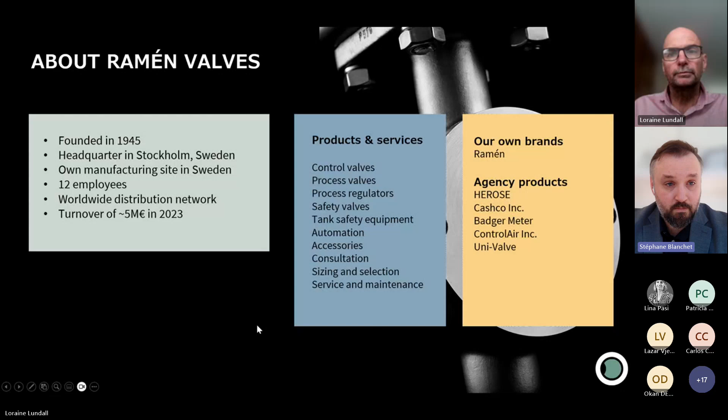Yes, Loraine, you can move on. Okay. Yeah, right, so that's on you now. You can continue. Right. My name is Loraine. Good afternoon, everybody.

I will first and foremost just go to the website. So at ramenvalves.com, you will find a lot of information about valves and valve solutions. And now we're running information on hydrogen. You're welcome to go and read up on that. If you want to go to the product platform, you can select any of the products, and it will take you immediately to the product platform.

Okay. Sorry, on top. And then on the product platform, you can choose valves, process valves, regulators, safety valves, tank safety equipment, and spare parts. I just quickly want to show you how it works. So we go to control valves, and you can then select whatever control valve you want. In this case, just quickly select a Ramén KSC valve, and it will take us to a configuration.

So in the configuration tab, we can select a modulating valve, size DN50, soft seated design, single acting, 4-20 milliamp, and immediately it will give us all the technical specifications here. You can get some more information there, and then at the bottom you will find data sheets, instruction manuals, certificates, brochures, 3D STEP files. You can also compare this to another valve if you want to.

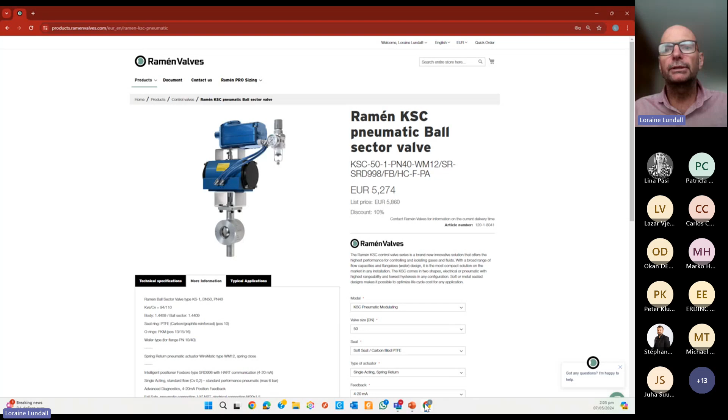Okay, let's go to the sizing. So from here, you can go to the control valve sizing. I've already opened it, so I'm just going to jump in and go to the sizing tool. So the sizing tool is a highly specialized sizing tool from Conval. It is a very professional sizing tool, and we suggest that you make use of it as much as possible.

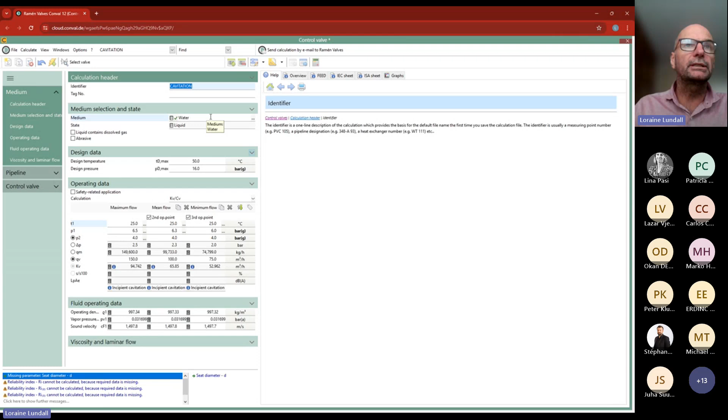First of all, you would like to change your units. You can select imperial or USA units, or you can select metric units. In this case, we selected metric units. For cavitation, we're going to make it easy, and we're going to do just plain water. We select water. You can just type in water by name, or you can go and search for it in the 3 dots on the side, and then you can search for the fluid that you want to size for.

Design data we're going to use as 50 degrees Celsius, and maximum design pressure 16 bar. So let's quickly go through the process data. We're going to have 3 points, a maximum, mean flow and a minimum flow. And we have 25 degrees on the inlet. We have 6.5 bar for the maximum flow, 6.3 for mean flow, and 6 for minimum flow. We have bar gauge. This is pressure control, so we will have all on 4 bar for the outlet pressure.

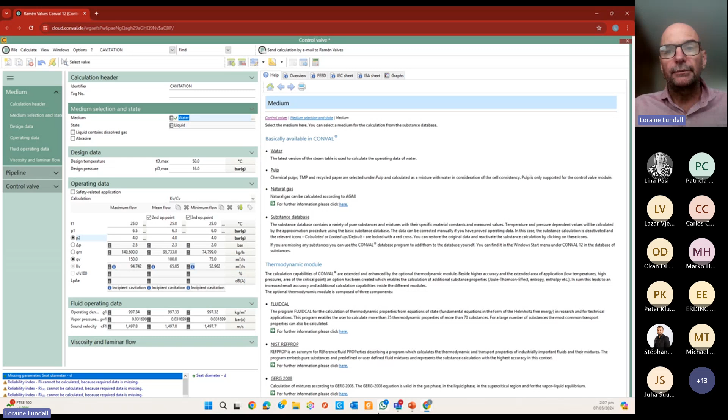Our flow rate is volumetric flow rate, and it's 150 at maximum flow, 100 meter cubes at mean flow, and 75 meter cubes at minimum flow. So I'm not going to go into and select the product right away, but at this stage, as you will see, we have information that says we have incipient cavitation. So let's go to the details, and we go to the next slide, and we will discuss from here.

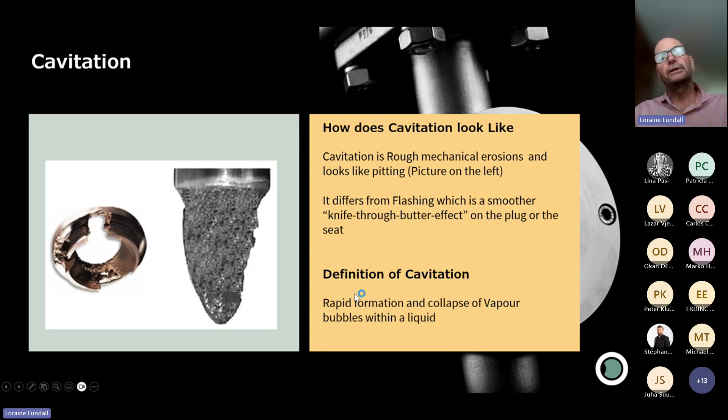So let's first ask ourselves a question: what does cavitation look like? Cavitation is a rough mechanical erosion, and it looks like pitting, as per the picture on the left. Where it differs from flashing is a smoother knife-through-butter effect on the plug and the seat. Many of you have probably seen this and wondered what happened to your valve. Now, the definition of cavitation is the rapid formation and collapse of vapor bubbles within the liquid.

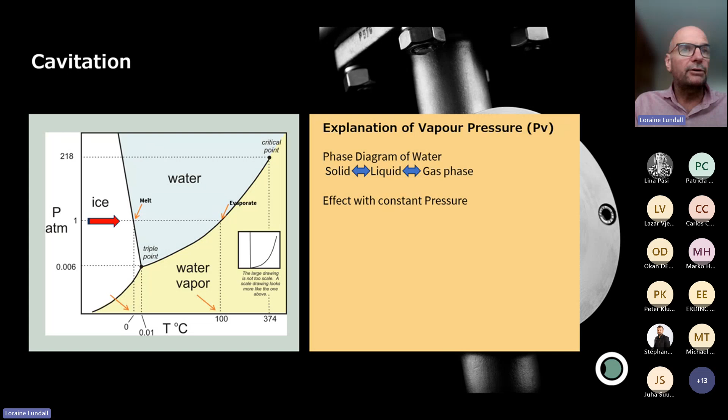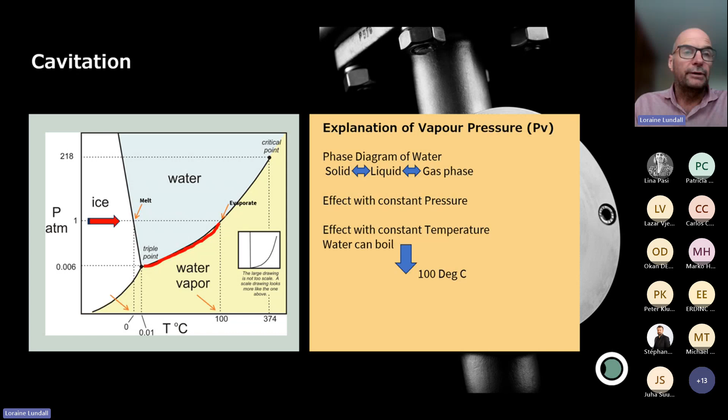So the effect of constant pressure is at 1 bar, water will melt at 0 degrees Celsius and will evaporate at 100 degrees Celsius. The effect of constant temperature, where the pressure changes, water can boil below 100 degrees Celsius, and water turns to a vapor form. So how does cavitation occur?

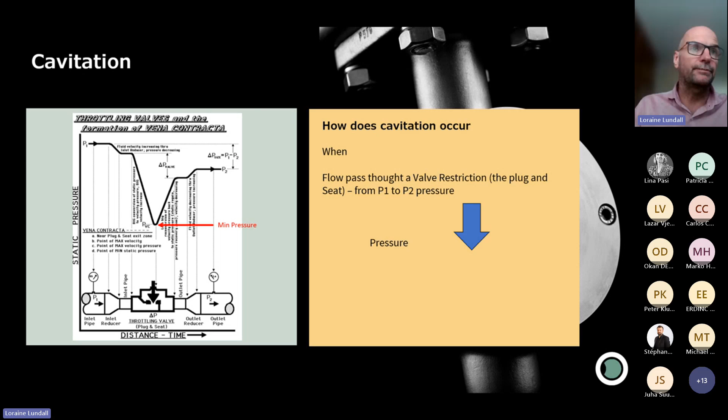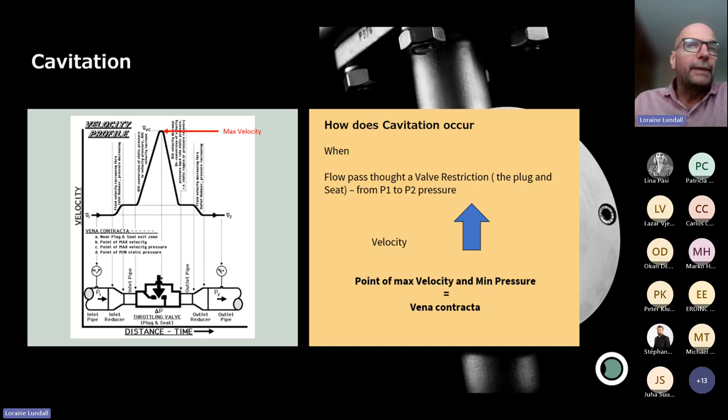When flow passes through the valve restriction, the plug and the seat, from high pressure, P1, to a lower pressure, P2, the pressure decreases to a point of minimum pressure. As the pressure decreases going from P1 to P2, the velocity increases. The point at maximum velocity and minimum pressure is your vena contracta. You also notice that your vena contracta is downstream of your orifice, not exactly at the orifice.

So when the pressure drops below the vapor pressure, we have 3 graphs on the side. Here our inlet pressure goes down to the vena contracta, and to the lower P2 pressure. It does not cross the vapor pressure. In the second graph, our vapor pressure and vena contracta are the same point. So that is almost where the cavitation will start.

The third graph, you will see that Pvc crosses the vapor pressure, a bubble forms, and it recovers downstream, and the bubble implodes at P2. And that is when cavitation starts. So the first step of cavitation is the formation of the bubbles. When the P2 pressure recovers above the vapor pressure, the bubble implodes or collapses. I can quickly show you a quick video of how this looks.

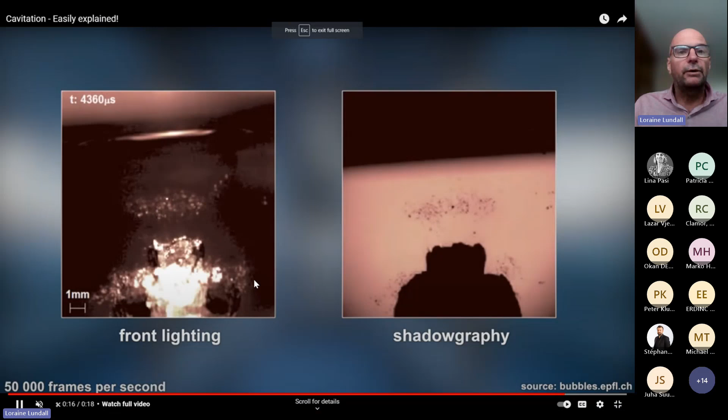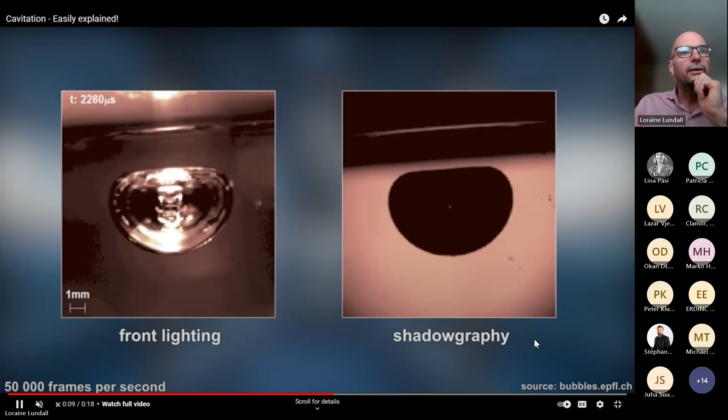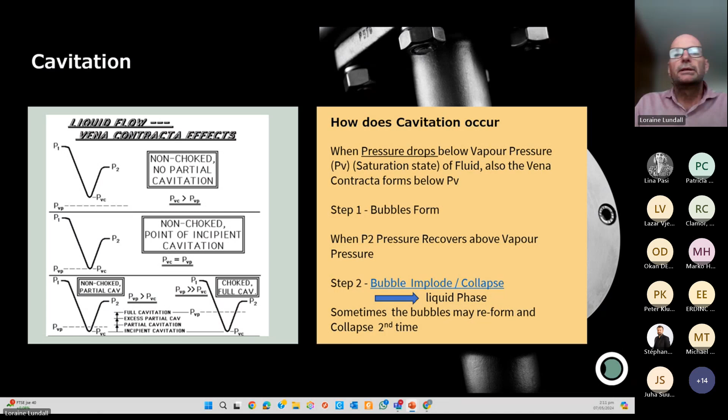And you will see there the bubble gets some pressure from the top, indented, a jet forms, and it pushes the bubble and it implodes. So going back to the slide. What we see is the implosion of the vapor bubble. Liquid microjets form. The liquid microjet from the recovering pressure creates an indentation in the bubble.

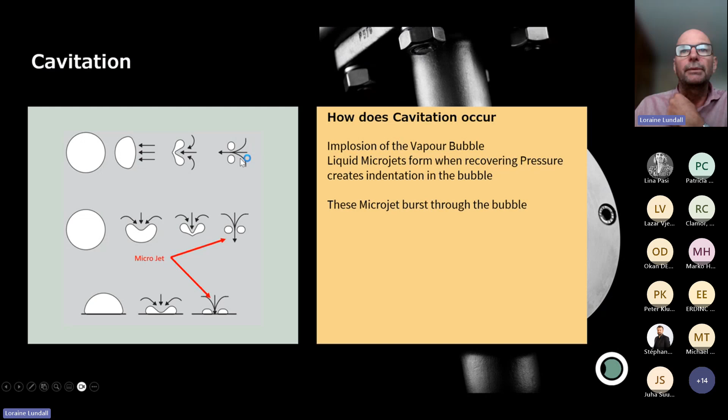These microjets burst through the bubble, and the implosion and the collapse also cause pressure waves up to 100,000 psi. The combination of the microjets and the pressure waves cause mechanical damage to the plug and the seat, as well as the valve body. It also causes noise and vibration, loss of efficiency, and loss of process control.

So in this picture, you can see where it implodes. In this bottom picture, you can see where it implodes against the wall of the valve. And this is where it will physically damage your valve at high speeds.

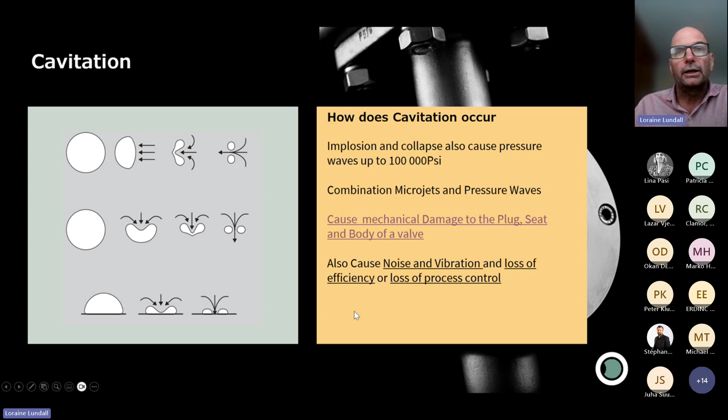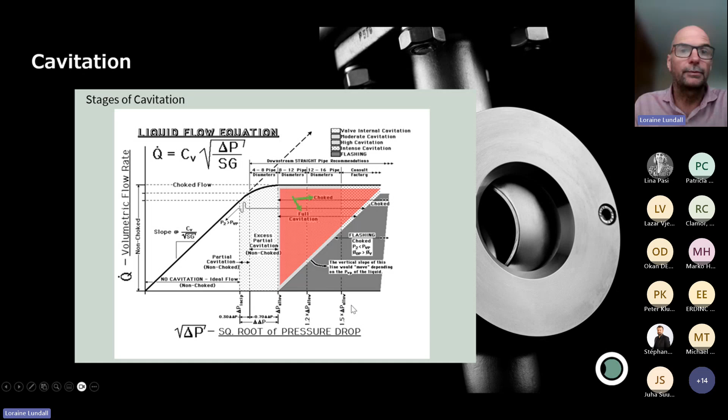Cavitation does not always cause damage. Damage will occur when, as I just said, the intensity of the cavitation is high, when the delta P is high. When materials used in the area of cavitation are not hardened; hardened materials reduce the damage. Continuous exposure to cavitation: if the valve is continuously exposed to cavitation, then the long-term effect of that would be horrendous for the valve.

The valve size: larger valves sometimes make it worse because the valve will control to a position closer to the seat, and wear will just cause the trim to be damaged more. The wrong design of the valve and trim, and leakage occurring between the plug and seat. When leakage occurs between the plug and seat, you obviously have a high pressure going down to a low pressure. This will cause cavitation, and that will damage your valve. So preferably you will need to look at leakage.

Cavitation is caused by fluid pressure, not by flow. This is very important to note. On the picture on the left, you will see that with the valve at 25% open, the cavitation occurs close to the seat area. As the valve opens more, the cavitation actually moves downstream into the pipe. And it is interesting to see that the flow just changes the location and not the effect of the cavitation.

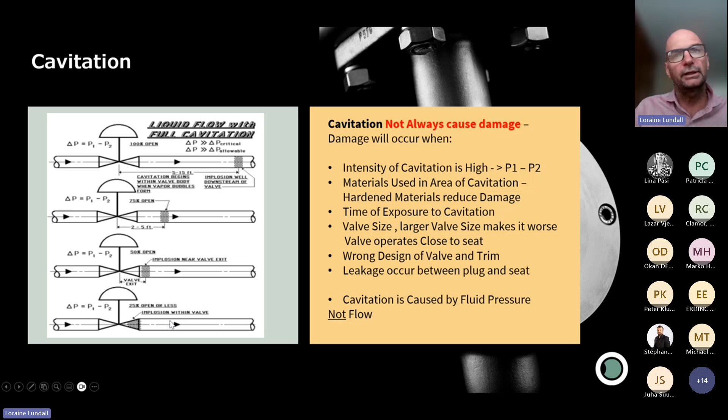Good. So I'm going to go to Stéphane now. How Ramen overcomes cavitation; he's going to address the first point for us. Yeah, so as you say, there are several stages of cavitation. First you have incipient cavitation, and then you have severe cavitation or choked cavitation, as we say. We will see in our sizing program that it will state which stage it is.

Most often, when you have incipient cavitation, we can handle it by using our model KS1B, which is our metal seat design. It's a full stellite seat with a hardened ball sector. The ball sector is treated with Expanite treatment, which increases the hardness, typically by 5 times the standard hardness of stainless steel. So for incipient cavitation, we can use our model KS1B, and that will definitely solve the problem, meaning that the cavitation itself will not have any effect on the valve. You won't have any damage on the ball sector or the seat because the parts are hard enough.

The 1C is a little bit more complex or more robust because we have some other parts in the valve which are treated, such as our seat holding ring, which is basically the cover on the body, which is also in contact with the media, and we treat it also with Expanite treatment to increase the hardness. So that's a very robust design that can definitely overcome incipient cavitation. All right, Ryan. Yep. Good.

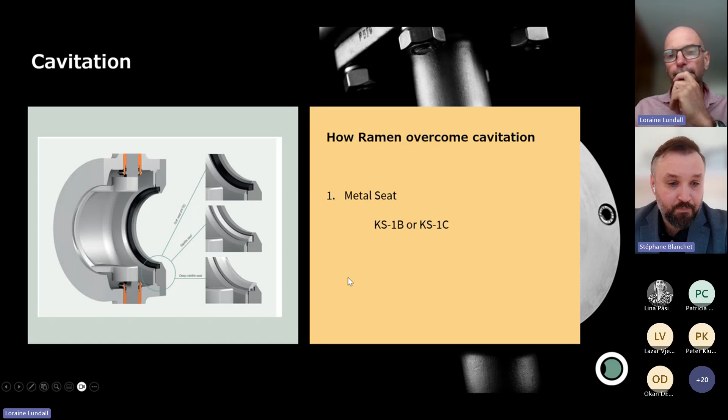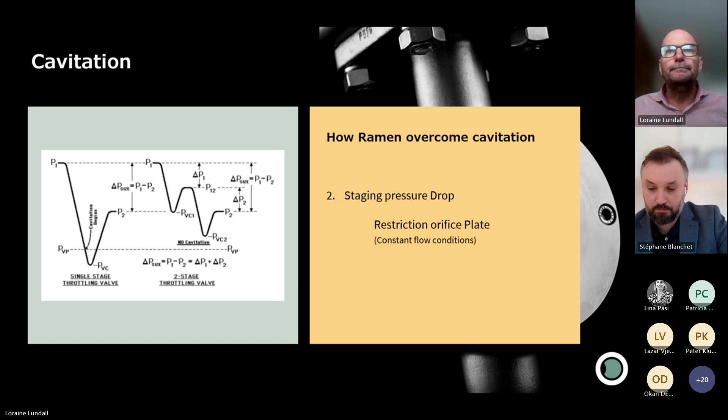So the second way to do it is to stage the pressure drop. By staging the pressure drop, you actually prevent the vena contracta going through the vapor pressure. So going from P1 to P12, the pressure doesn't drop that severely, and it doesn't go down to the vapor pressure. Then on the second stage, you go from P12 to P2, and your overall pressure drop is then without cavitation. So a restriction orifice is a good solution in this application, especially where there are constant flow conditions, not highly varying flow conditions. So yeah, a good solution to solve the problem. Stéphane, will you take this one for us?

Yeah, so that's typically when you have severe cavitation, when you cannot stage the pressure drop. You may have, for example, particles in the media and so on, so you may not be able to use an orifice. And then what we can provide in that case is our model KS1E. So it's actually also a stellited seat ball sector valve, which is always fitted in reverse flow. So that's basically the picture on the bottom left.

You see on the top left what it should be, normal direction. So the flow enters on the right and exits the left, and you have possibly the vena contracta inside the valve. But if you put it in reverse flow, the bottom picture, then you have the vena contracta outside the valve, which means that the cavitation will happen outside the valve. And as a result, of course, the body, the ball sector and so on will remain intact because no cavitation will actually happen inside the valve.

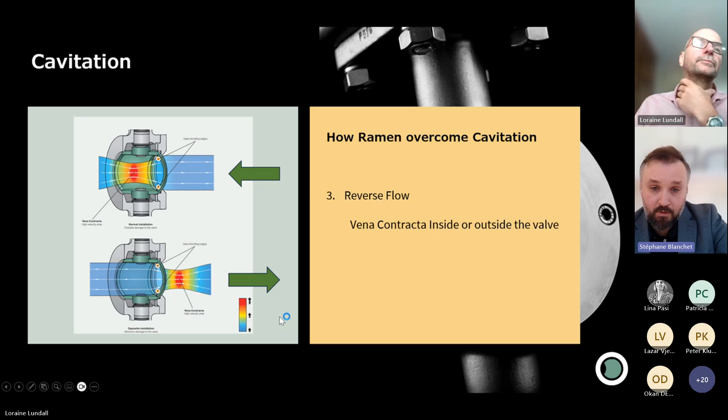So that's something that we sometimes provide whenever we have customers looking for a solution with similar products having damage on the body or the bore or the plug, whatever. Then we provide our most robust solution, which is our model KS1E. We put it in reverse flow at the bottom left, and cavitation will happen outside the valve, definitely protecting the body, and you will not have any damage inside the body. So that's a way that we can solve it as well.

Okay. Yes, and then there's a rule about location. It doesn't just apply to piping, but also to valves. It's important that you always look, when you have cavitation, at how much downstream straight pipe you have. There's a recommendation of 4 to 8 in normal cavitation. In full cavitation or severe cavitation applications, anything from 8 to 16 pipe diameters. Also look that there's no elbows. Make sure that that is out of the way. It just helps your valve and your whole system a lot when it gets to cavitation.

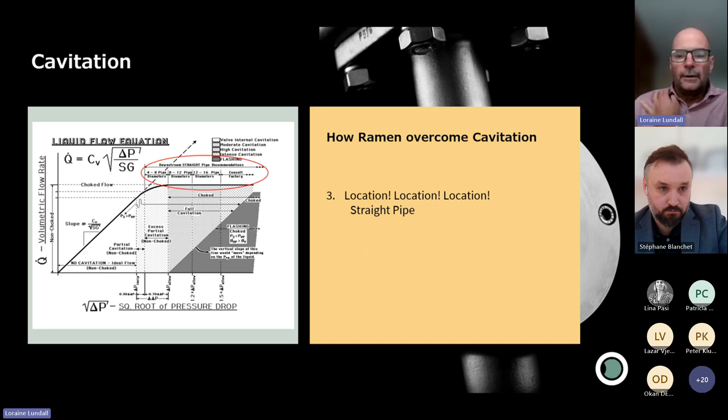All right, now let's go back to the sizing, which we've done. So now we see that we have cavitation here, and we're going to select our valve, and we're going to start with the KS1, and we selected the DN100 because we know that this is going to work. Yeah, so the program is designed in such a way that... Sorry, Stéphane. Yeah, just saying that the KS1 is a soft-seated design. Soft-seated valve. Yes. So let's try this.

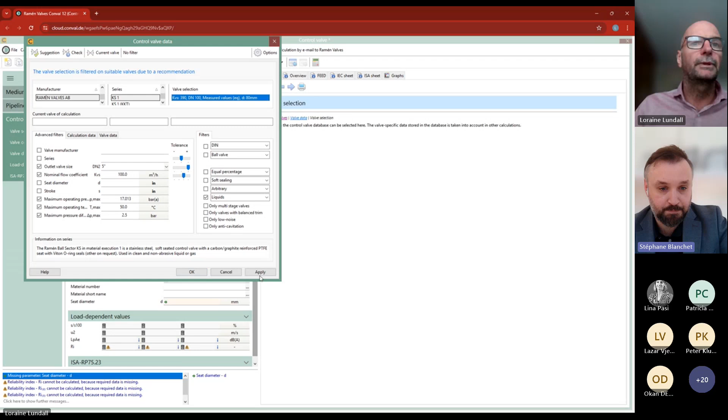So immediately we see soft-seated has an exclamation mark. It says that valves with soft seats are not suitable for cavitation applications. Also, if I go to the overview, we see that our reliability index is 1. Stéphane, will you discuss this for us quick? Yeah, this is to show you that whenever you use this sizing, you may find this RI index shown in red like that, a high value, and you don't know what it is.

So you see on the right you have this help window that's very convenient. You just need to click somewhere and you will have information about what it is. So in that case, Loraine, click on the RI on the left panel, and we have information about the reliability index. So right now it's 1, and basically the reliability index is calculated by the software itself. It takes all process data, so of course pressure, temperature, flow and so on. Then it calculates the velocity inside the valve, the noise level, possible cavitation, and so on, and ends up with an index.

And basically, you always want to have this index as close as possible to 0, because if it increases too high, for example closer to 1, then you may have possible damage inside the valve. It's an index, of course, so it doesn't mean that you will have damage, but you may have damage. But anyway, you always want to have it closer to 0, and here it states that between 0 and 0.1 it's not a problem, and higher than 0.1, then you have to check carefully.

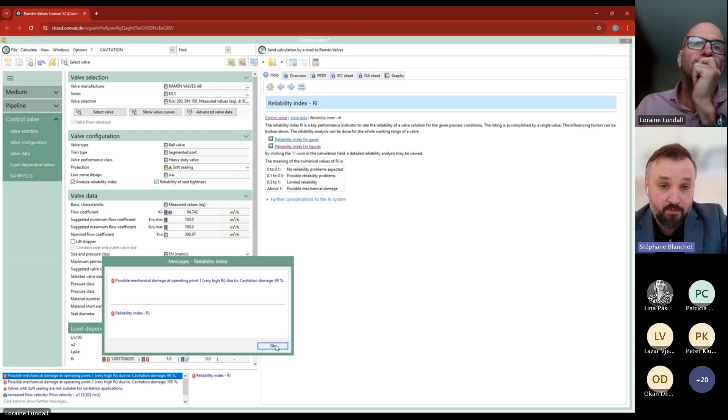Here it is 1, so it's quite high, and clicking on the exclamation mark here, you can see it pops up a small window saying this is due to the cavitation. So 99% of the reliability index is due to the cavitation. So it's not noise, it's not velocity, it's purely cavitation. And as we stated, this is incipient cavitation. If you go to the overview on the right, you can see the stage of cavitation. You will see incipient cavitation.

And as we told you, just using a model 1B metal seat design will probably solve this issue. So if we look at model 1B, then we'll see what the new reliability index will be. Just use no filter. Yeah. So of course, there are a lot of models, and if you don't know which one to select, you're always welcome to come back to us and ask us.

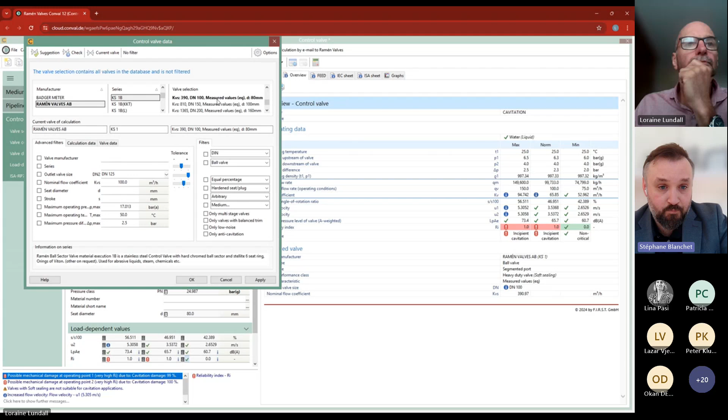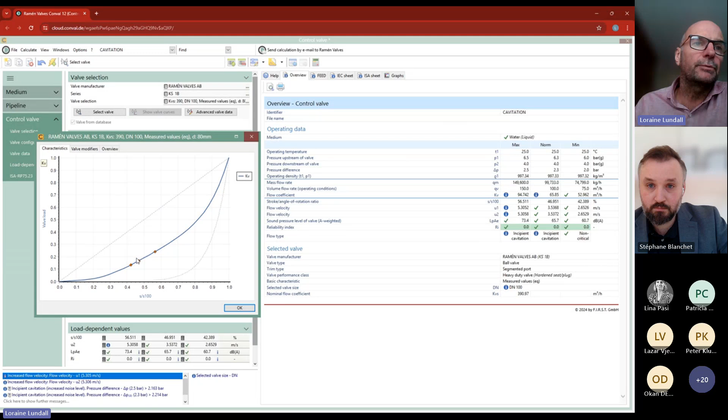All right, now it goes to 0, meaning that it's not a problem at all for the valve. It can handle it. Okay. All right. Now, from here, I just want to go through this again. So from here, you can look at the flow curve. We'll see where the valve is open. The valve is open between 40 and almost 60%, which is good for this application. No cavitation, reliability index is 0.

And now you can just send this and print, and you just send this to us. Sorry, I can't. Yeah, you have the send calculation by email on the top. Huh? Yeah. On email. Right. This one, yeah, there. Okay, it moved. That's the one. If you want to get the PDF and so on, just click on it, and yes, here you have a pop-up appearing, and then you can send it. Yeah, and then you receive a copy with PDF and so on, so you can use it as well. Okay. Good.